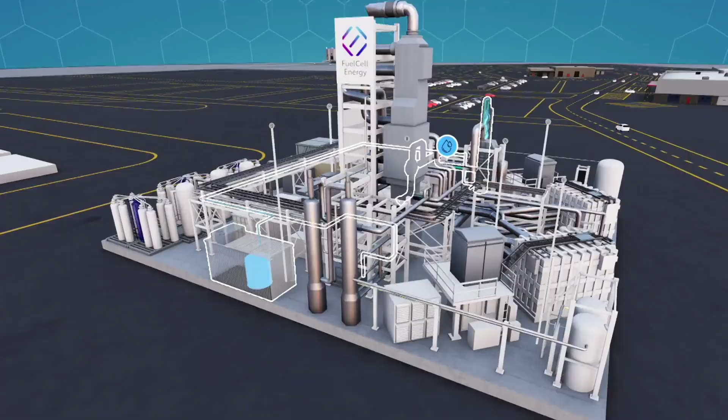Although FuelCell Energy's stock had a long, powering down phase, some investors hold on for another sizable rebound, partly because of promising developments like the agreement with CGN Yulchon Generation, CGN, a prominent independent power producer in South Korea. After we go over this powerful potential to push FuelCell back up, let's take a broader look at the background of what keeps some investors clinging to the clean energy company, to see the green future from their point of view.

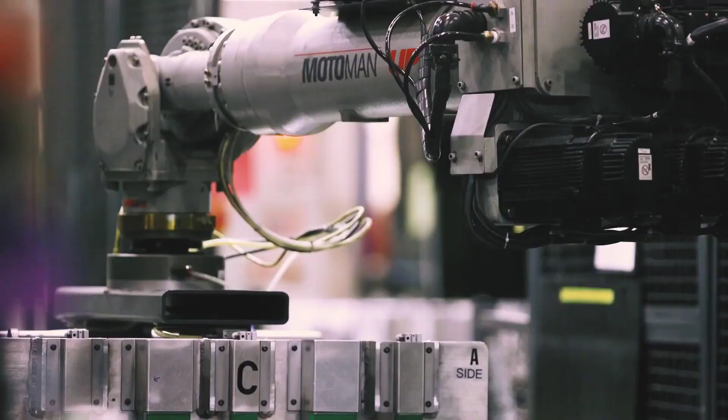The deal with CGN centers on the purchase of fuel cells and maintenance services. Under the terms of the deal, FuelCell Energy will supply CGN with 8 advanced carbonate fuel cell modules, along with comprehensive operations and maintenance services for 4 fuel cell units at CGN's Gwangyang facility. Each fuel cell unit comprises 2 fuel cell modules, and the agreement spans 7 years with an option for extension beyond the initial term.

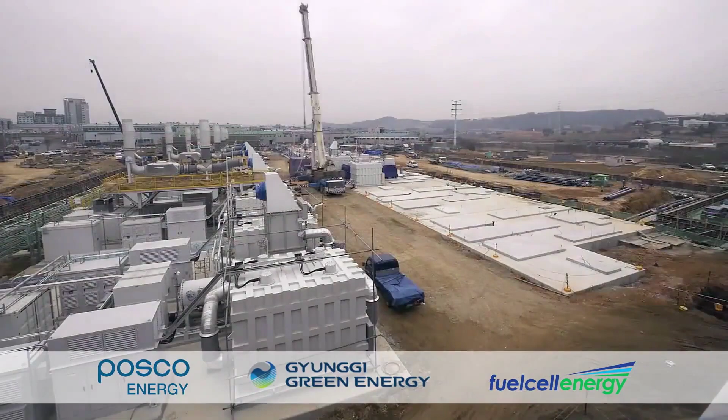The Gwangyang facility primarily focuses on electric power generation, transmission, and distribution, and operates 4 of FuelCell Energy's SureSource 3000 carbonate fuel cell systems. Each system produces 2.5 megawatts of low-carbon baseload power.

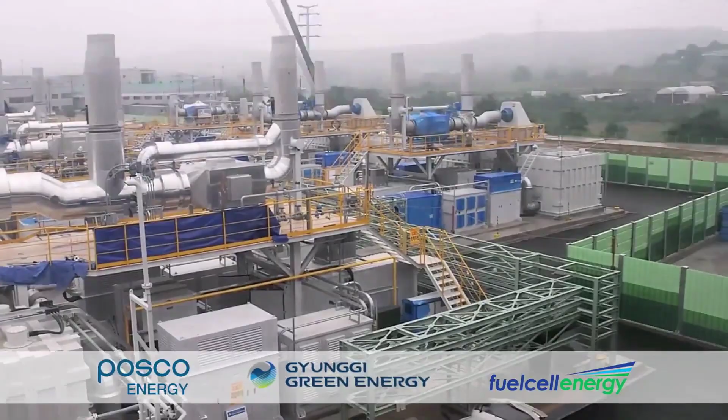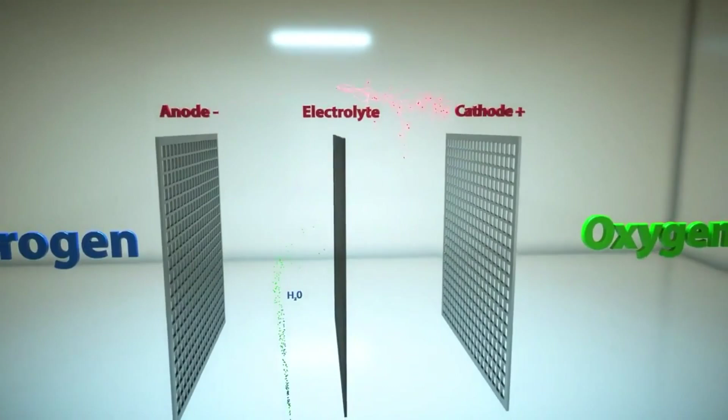The project aims to enhance the performance and extend the operational life of the installed units, aligning with CGN's decarbonization objectives and South Korea's hydrogen economy roadmap. This collaboration attracted optimism because it highlights FuelCell Energy's position as a leader in utility-scale electric power production and its strategic footprint in Asia's advanced fuel cell market. It also shows clear momentum in repowering utility-scale assets.

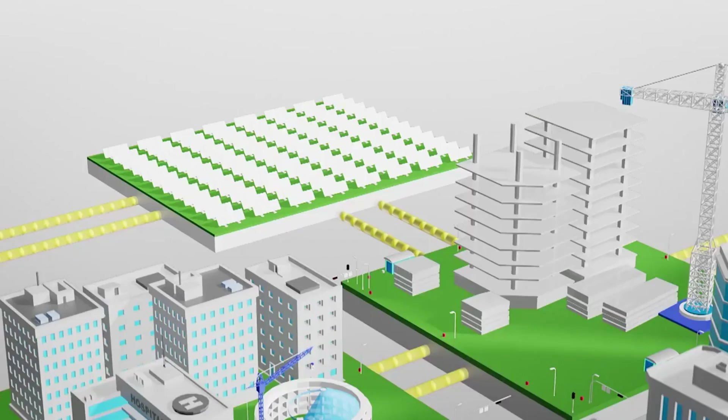With this agreement now in backlog, alongside existing partnerships with Gyunggi Green Energy and Noeul Green Energy, FuelCell Energy's future is charging up for continued growth. The company's technology offers a proven, scalable, and clean energy platform that supports electric grid security and meets the increasing demand for power driven by data center growth.

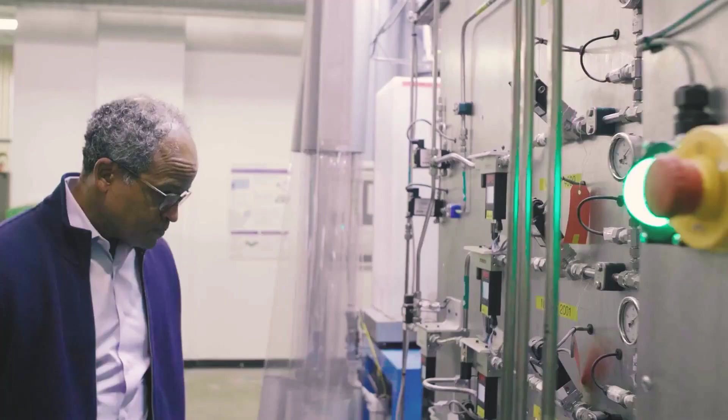FuelCell Energy's president and CEO, Jason Few, emphasized the company's ability to deliver reliable, high-performance fuel cell solutions that meet evolving partner needs. Few highlighted the company's contribution to Korea's clean energy agenda and its role in addressing the world's growing electricity demands through high-efficiency, low-emission baseload power.

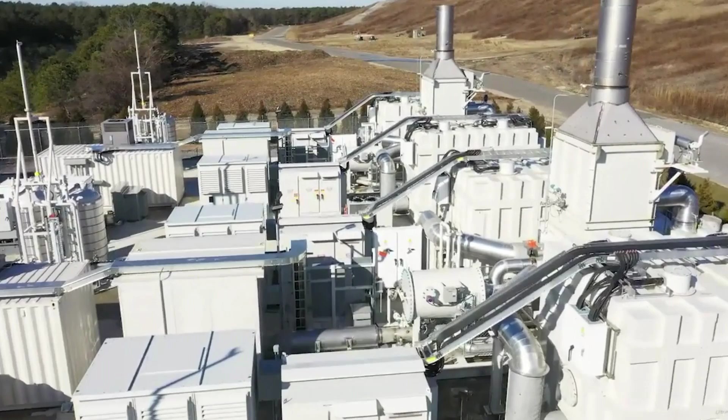FuelCell Energy's business in Korea validates its position as the only fuel cell provider delivering utility-scale power and steam for district heating and industrial processes. The company has maintained a dedicated service team in Korea since 2018, supporting over 100 megawatts of installed capacity across the country. Its long-term service agreement, LTSA, model ensures optimal performance and uptime through 24/7 monitoring, on-site technical support, and preventative maintenance, providing confidence in its clean energy solution for high-demand industries like data centers.

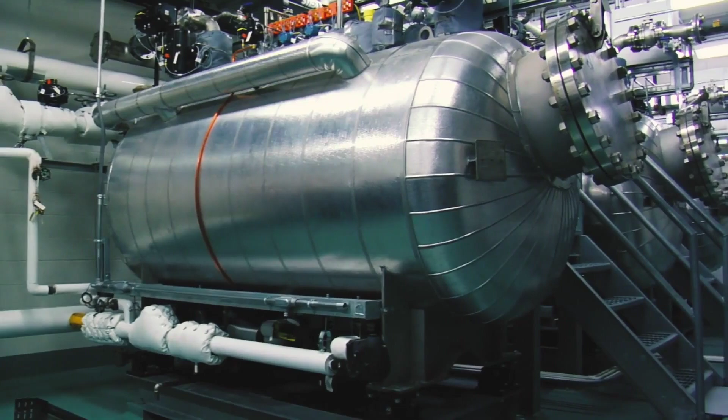Founded in 1969 and headquartered in Danbury, Connecticut, FuelCell Energy has been innovating and developing commercial technologies that produce clean electricity, heat, clean hydrogen, and water, as well as carbon capture technology. Their business model focuses on generating recurring revenue through power purchase agreements and long-term service agreements, as well as non-recurring revenue through power platform and component sales and research contracts.

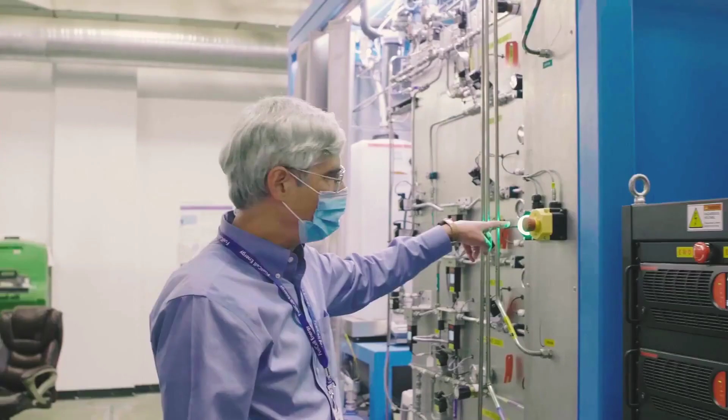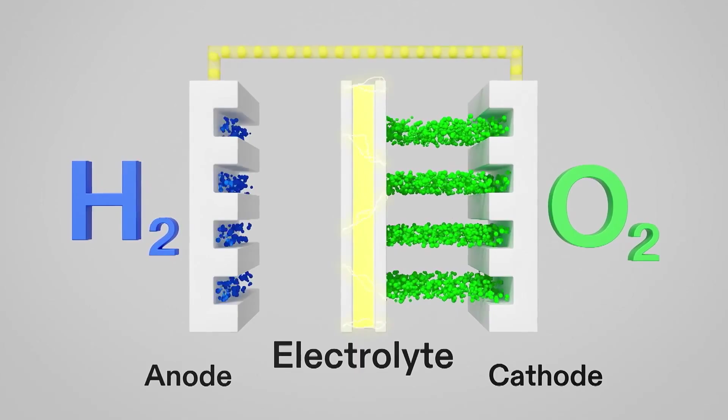FuelCell Energy's commercial product portfolio is based on its carbonate electrochemical platform, which offers a range of products for power and chemical applications like electricity, hydrogen, high-grade heat, water, and CO2 upgradable to food and beverage grade. The main target markets and applications are utilities and independent power producers, data centers, wastewater treatment, commercial and hospitality, food and beverage, and microgrids. FuelCell Energy markets its products primarily in the United States, Europe, and Korea, and is also pursuing opportunities in other countries around the world.

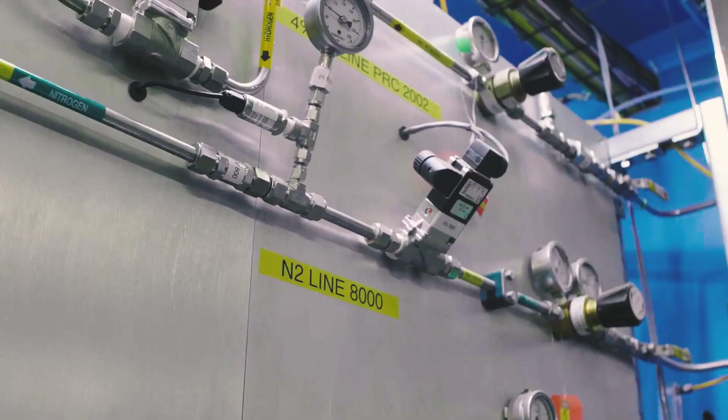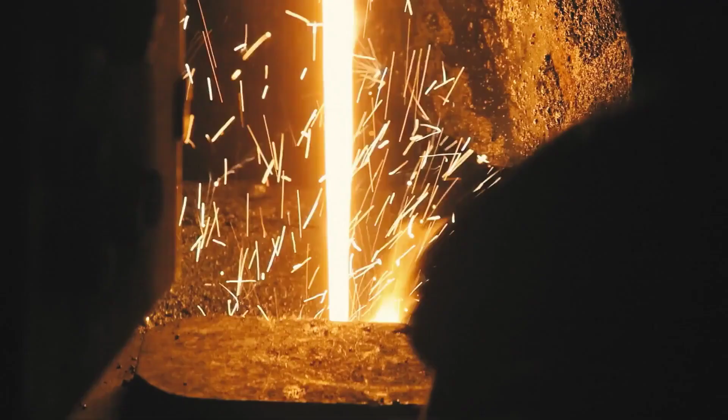Research and development efforts focus on generating revenue from its core recurring and non-recurring revenue sources, while also identifying new trends in clean energy that can be commercialized and grown into future revenue streams. The company believes that a large and growing addressable market opportunity exists for its commercially available solutions, and those solutions that are actively being developed for commercialization.

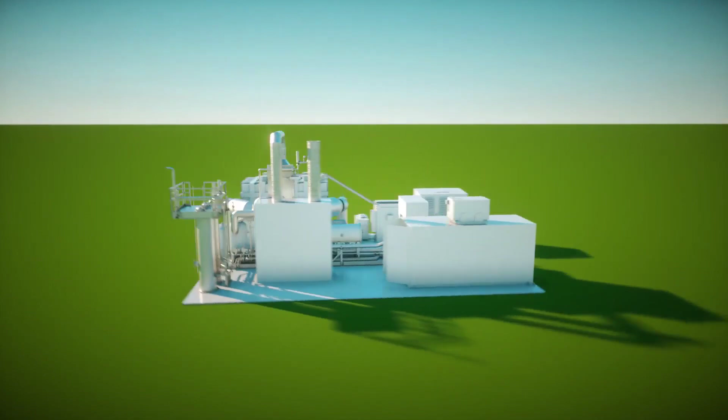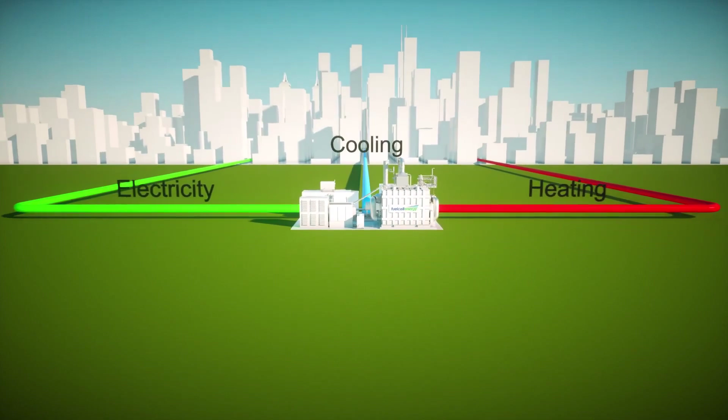Through the capabilities of its platforms, FuelCell Energy provides clean, reliable baseload power generation, hydrogen production, high-grade heat, carbon recovery, and the ability to use biofuels, renewable natural gas, and a hydrogen-hydrocarbon fuel blend for power generation feedstock. Additionally, their platforms can deliver the benefits of clean, distributed power generation, including the desirable value stream of thermal energy, and avoid the need for massive, expensive transmission infrastructure.

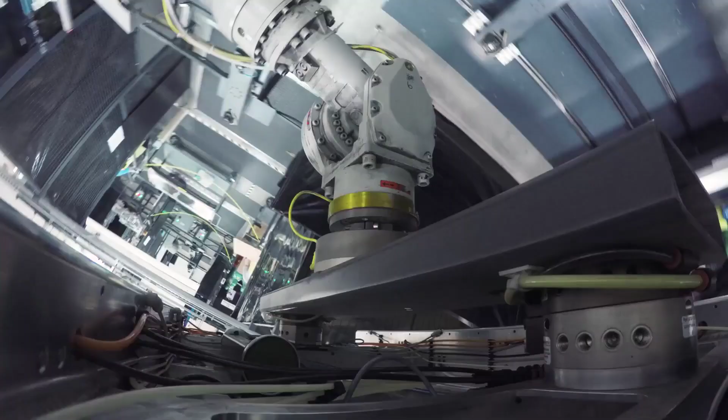FuelCell's platforms are also capable of delivering CO2 for various uses, such as food and beverage, pH balancing of water supply, and production of synthetic fuels, polymers, and other minerals.

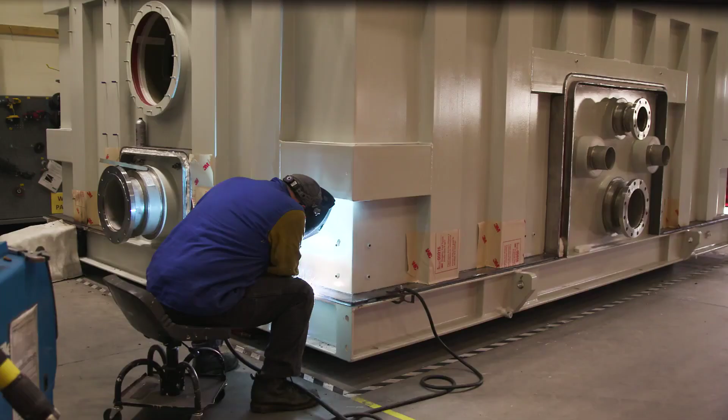Recurring revenue is delivered through electricity, capacity, and renewable energy credit sales under power purchase agreements (PPAs) and tariffs, as well as service revenue from long-term service agreements. Non-recurring revenue is generated through power platform and component sales, as well as from research contracts related to the development of advanced technologies.

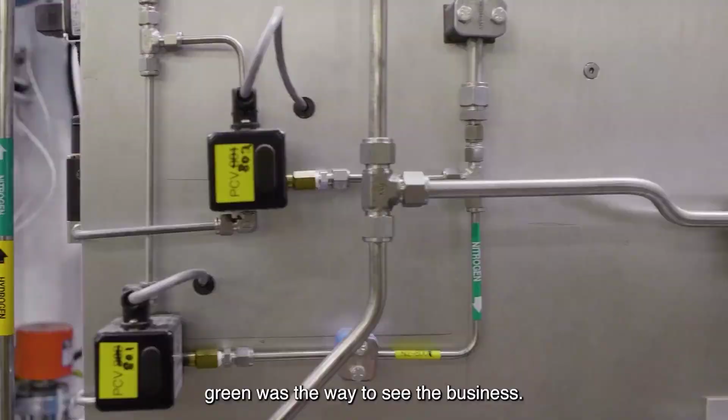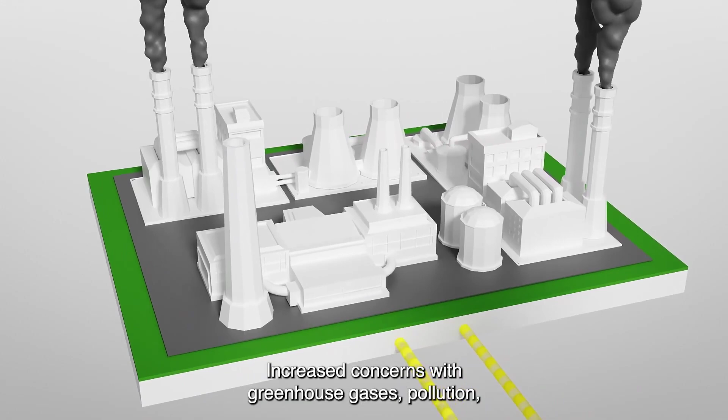FuelCell is a complete solutions provider for its platform solutions, controlling the design, sales, manufacturing, installation, operations, and maintenance of its patented fuel cell technology. They offer customers the option to either purchase its fuel cell platforms outright or enter into a PPA, under which the customer commits to purchase power as it is produced for an extended period.

The company may elect to retain ownership of a project or sell it to a third party, recognizing revenue from the sale and reflecting it in the product revenues line item.

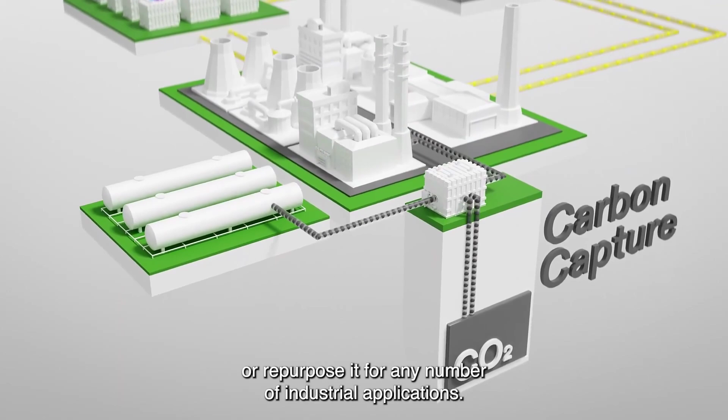FuelCell's product portfolio is based on its carbonate electrochemical platform, which supports power generation and combined heat and power applications using a variety of fuels, including a blend of hydrogen and natural gas or biogas blends, biogas, renewable natural gas, and natural gas. The fuel cells utilized in these platforms react fuel electrochemically without combusting the fuel, which avoids emissions produced by combustion such as nitrogen oxides, sulfur oxides, and particulates.

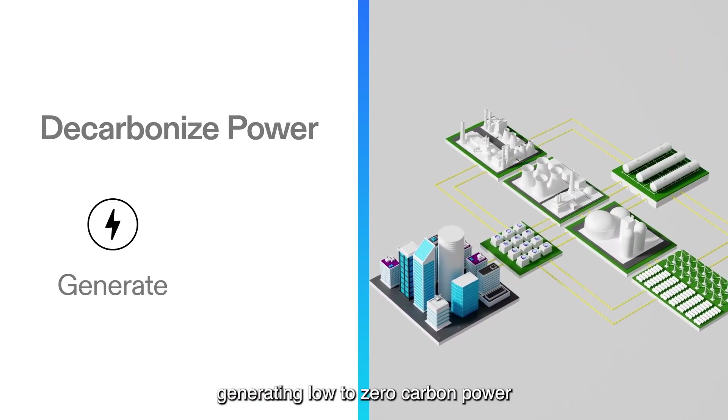Carbonate platforms are enabled to recover and capture their own CO2 for use or sequestration before it is emitted into the air. These platforms are unique in their ability to also capture CO2 from an external source, utilizing the flue stream of a power plant or an industrial boiler as a replacement for ambient air intake.

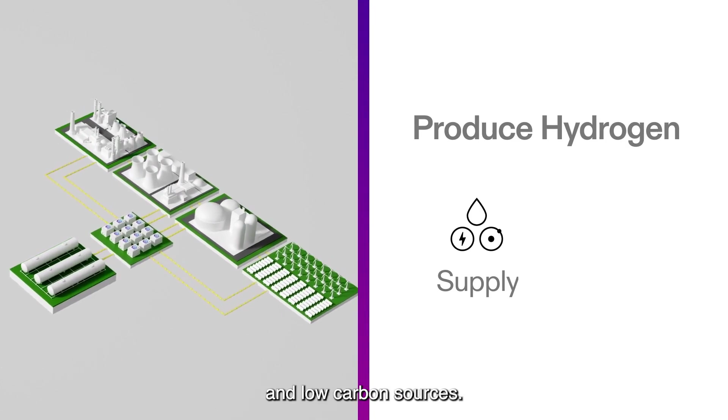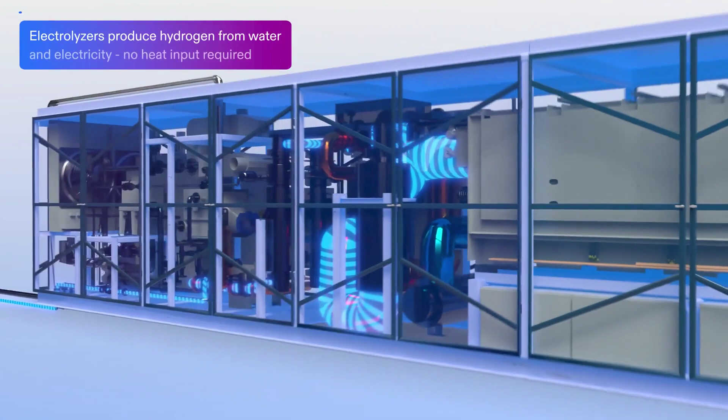There's also continued investment in the development and commercialization of its solid oxide fuel cell platform, including actively seeking strategic partnerships that will enable it to deploy this technology as part of larger-scale energy, emissions reduction, and hydrogen generation projects. The multi-featured platforms can be configured to provide a number of value streams, including electricity, hydrogen, high-grade heat, water, and CO2 upgradable to food and beverage grade, and/or usable in cement or other industrial products.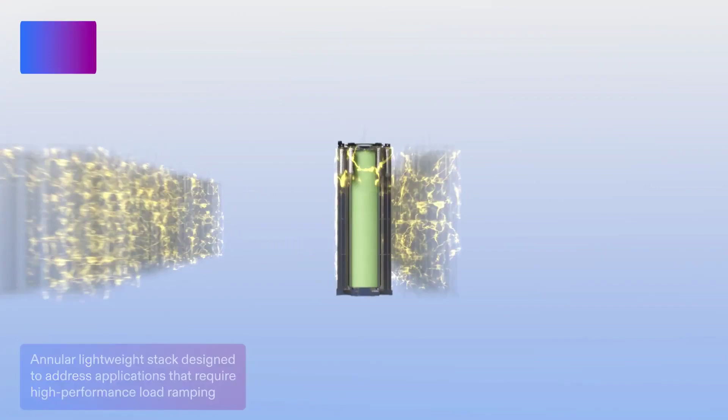The electrical efficiency of carbonate fuel cell solutions ranges from approximately 47% to 60% upon initial operations of its platforms, depending on the configuration. When configured for combined heat and power, the system efficiencies can potentially reach up to 90%, depending on the application. Solutions are designed to deliver high electrical efficiency where the power is used, avoiding transmission line losses.

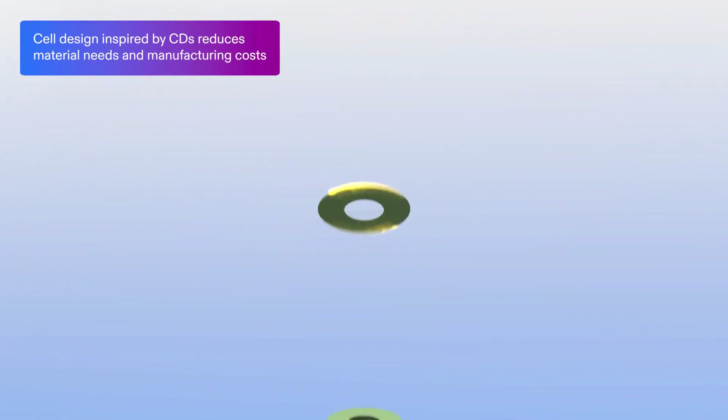Up to 95% carbon capture has been demonstrated from simulated coal power plant sources, while simultaneously producing baseload power. For harder-to-capture streams, such as natural gas power generation or industrial boiler capture, similarly high capture levels can be achieved, but with reduced power output.

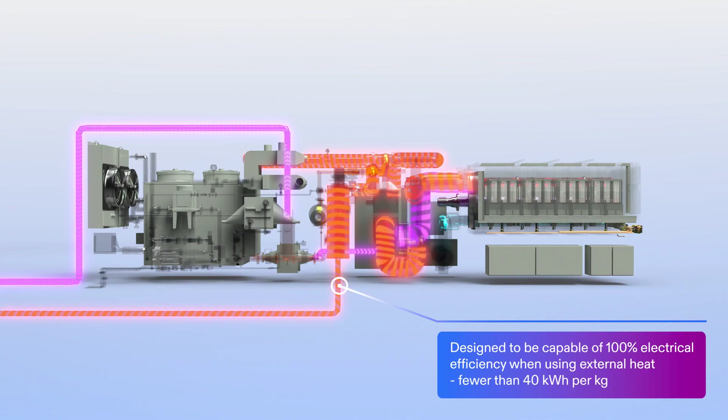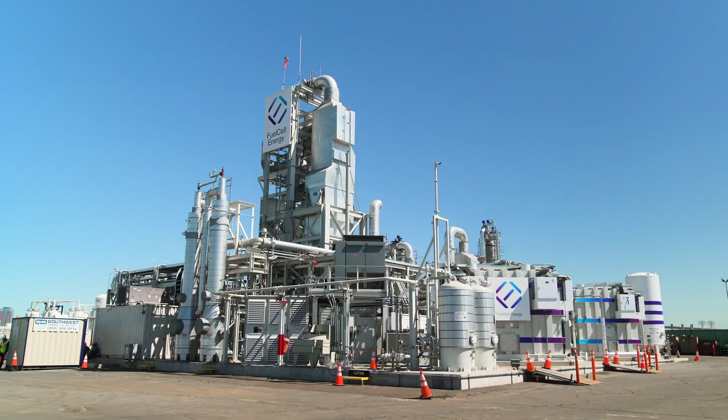FuelCell's product platform applications include carbonate-based distributed generation, carbonate-based distributed hydrogen, solid oxide-based electrolysis, and solid oxide-based long-duration hydrogen-based energy storage. Proprietary, patented platforms generate electricity directly from fuel, such as hydrogen, hydrogen and natural gas blends, biogas, renewable natural gas, and natural gas. The company's Tri-gen platforms are configurable to deliver on-site hydrogen for transportation, industrial applications, natural gas blending...

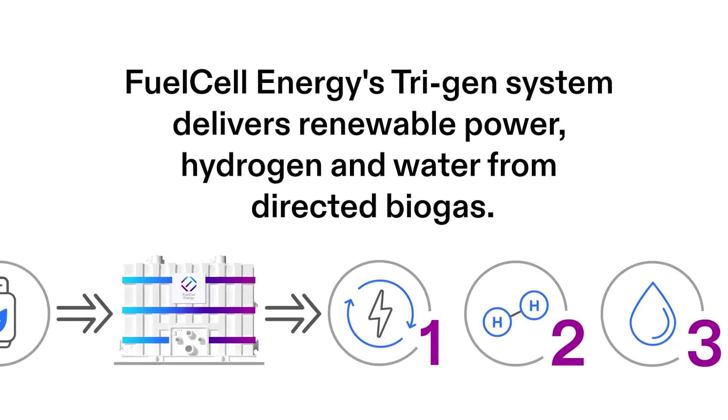...repowering combustion-based equipment with zero-carbon hydrogen, and other uses, while the solid oxide electrolysis technology is expected to enable production of hydrogen with high electrical efficiency.

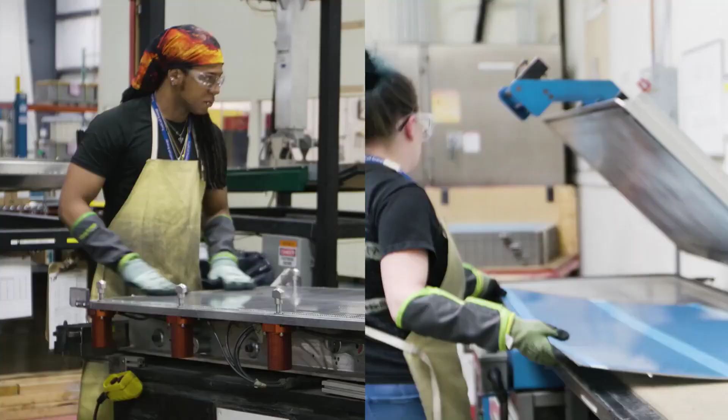At the same time, development is underway for a solution to deal with long-duration energy storage using its proprietary solid oxide electrolysis technology. FuelCell's solid oxide stacks are designed to alternate between electrolysis and power generation mode, with one of the design goals being improved integration of intermittent wind and solar power generation sources into the modern electrical grid via long-duration storage of energy.

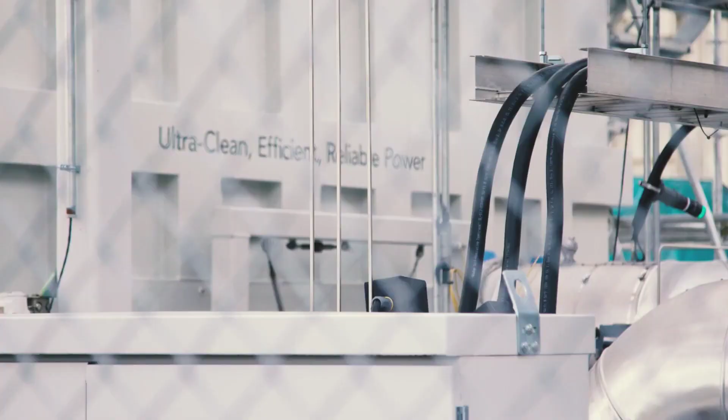To complement that, there's work on carbon capture, recovery, and utilization. The carbon capture system is being designed to separate and concentrate CO2 from the flue gases of natural gas, biomass, or coal-fired power plants or other industrial facilities. The carbon separation technology allows carbon dioxide to be easily extracted and purified to the appropriate level for utilization or sequestration, significantly reducing the carbon footprint of the generated power from its fuel cell platforms.

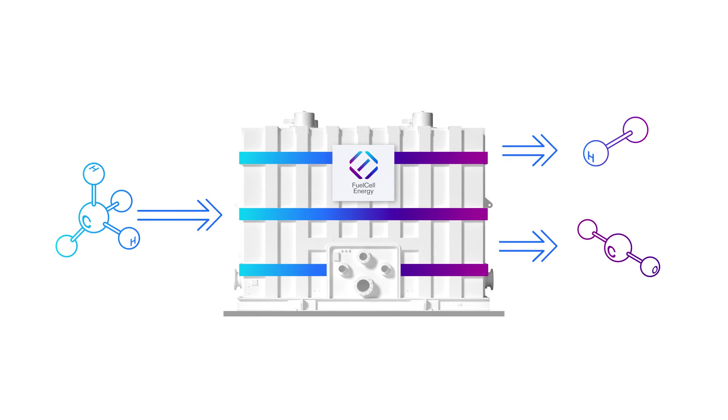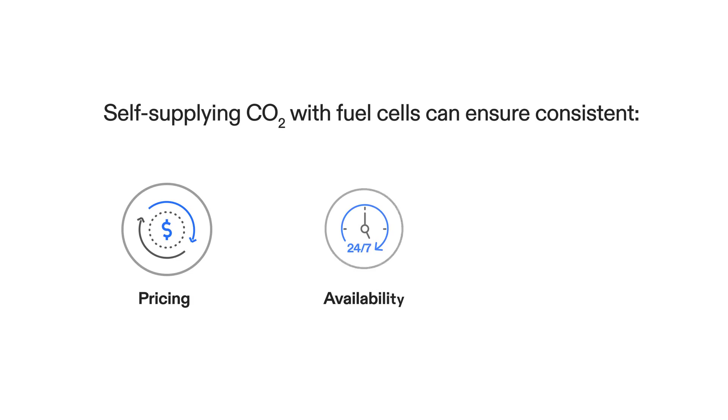When looking at FuelCell's four distinct targeted market opportunities, distributed generation covers utilities and independent power producers, data centers, wastewater treatment, and other behind-the-meter and microgrid applications. Carbon recovery and utilization includes food and beverage and various industrial applications.

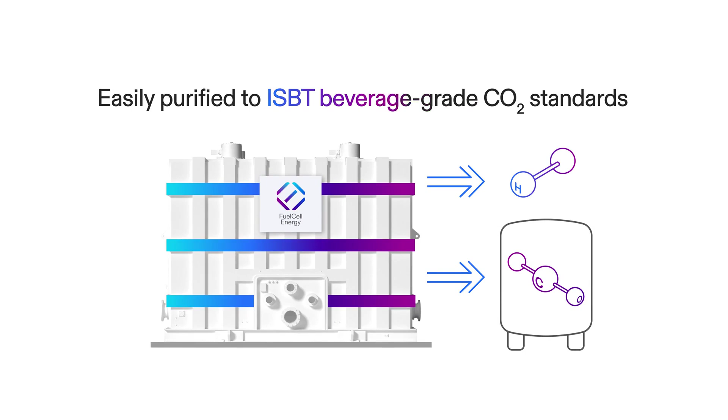Carbon capture includes high CO2 emitters, such as the oil and gas sector. Distributed hydrogen includes industrial hydrogen applications, like fertilizer, mobility and material handling, port applications, and large-scale wind and solar projects for their ability to produce green hydrogen via electrolysis. FuelCell's power platforms are fueling customers from manufacturing facilities and pharmaceutical processing facilities to universities, healthcare facilities, and wastewater treatment facilities.

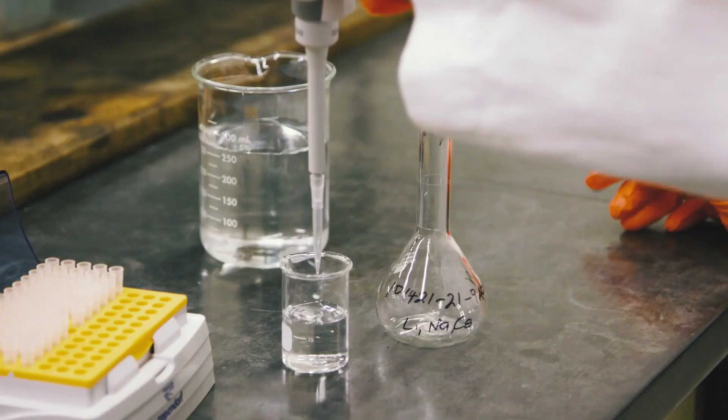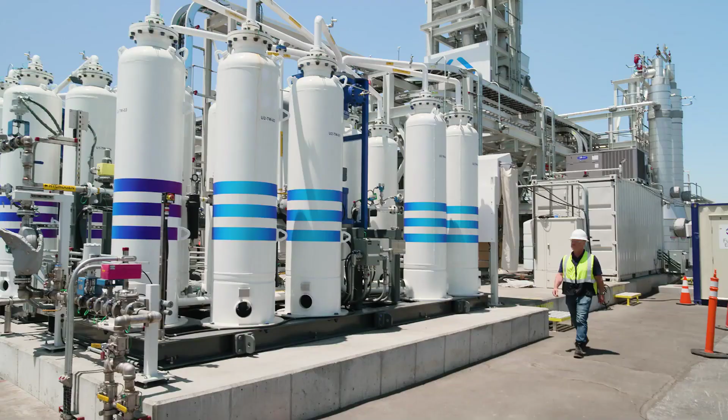Levelized cost of energy, LCOE, is measured over the life of a project, which includes capital cost, operations and maintenance cost, and fuel expense. Managing and reducing costs in all 3 LCOE areas involves cost system components and raw materials, advanced lean manufacturing principles, and improvements in lifetime product costs.

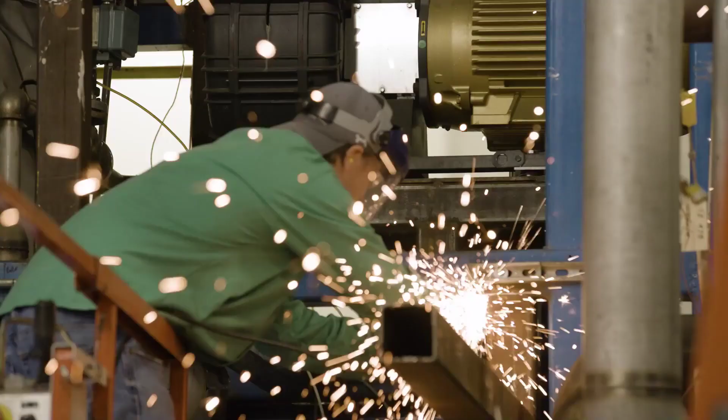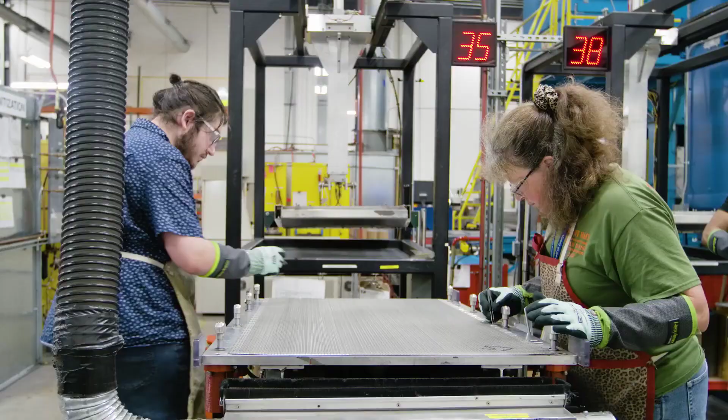The market for clean energy is highly competitive, with many factors affecting how clean energy can deliver outcomes for customers in a given region. FuelCell's platforms compete against large-scale solar and wind technologies. Although the company complements the unreliable intermittent nature of solar and wind power with the continuous, reliable power output of its fuel cells, the stationary fuel cell platforms also compete against other technologies such as microturbines, turbines, and reciprocating gas engines.

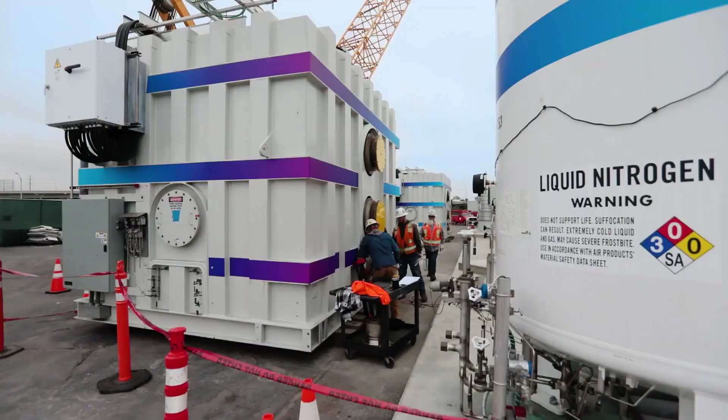FuelCell's goal is to continue to improve its competitive position, including innovating in areas such as offering multiple platform solutions and methods for producing clean hydrogen, solid oxide, and carbon separation and carbon capture in order to add value for customers looking for clean and renewable energy and to aid in their decarbonization goals.

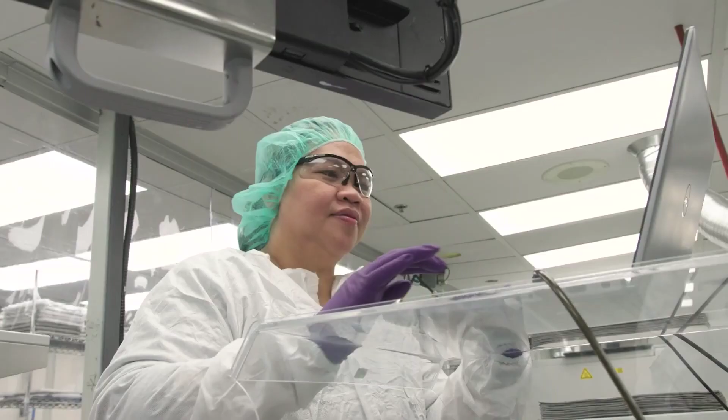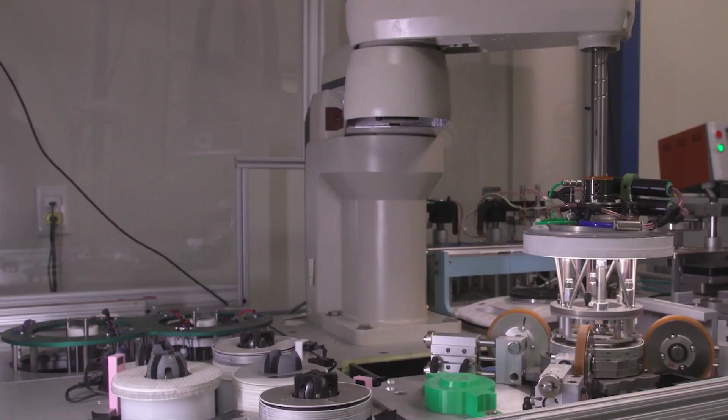FuelCell often highlights advantages like negligible amounts of NOx, SOx, and particulate matter emissions, and the ability to operate for many more hours of the day compared to intermittent resources like solar and wind. The company's platforms can also be used to produce hot water or steam, as well as hydrogen and carbon dioxide for beverage and food production, in addition to other industrial uses.

The Advanced Technologies Programs involves research and development and demonstration programs funded by third parties. These programs are focused on developing and commercializing solutions that advance solid oxide fuel cells, distributed hydrogen, and carbon capture. The company reports the revenue earned under these programs as Advanced Technologies contract revenues in its consolidated statements of operations and comprehensive loss.

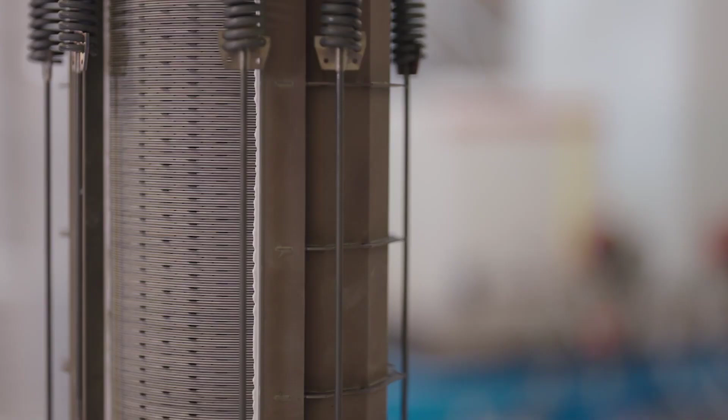Historically, FuelCell has worked on technology development with various U.S. government departments and agencies, including the U.S. Department of Energy, the Department of Defense, the Environmental Protection Agency, the Defense Advanced Research Projects Agency, the Office of Naval Research, the Department of State, and the National Aeronautics and Space Administration. Government funding has provided a small percentage of the company's revenue in recent years.

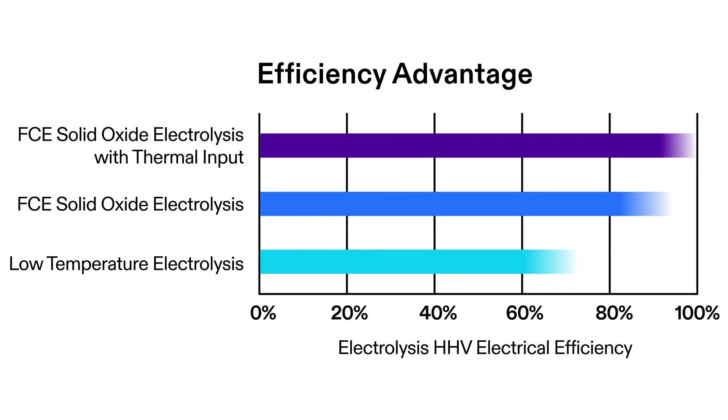In addition to government funding, the company also works to develop technologies through privately funded programs, with companies like Canadian Natural Resources, Drax Group, and ExxonMobil Technology and Engineering Company. The company has a license and joint development agreement with ExxonMobil Technology and Engineering Company, which facilitates the further development of the company's carbon capture platform.

The joint development agreement, which was originally effective as of October 31, 2019, has been amended several times to extend the term and increase the maximum amount of research costs to be reimbursed by ExxonMobil Technology and Engineering Company. The most recent amendment, Amendment Number 5, extended the term of the joint development agreement to December 31, 2026, and removed the cap on the maximum amount of research costs to be reimbursed.

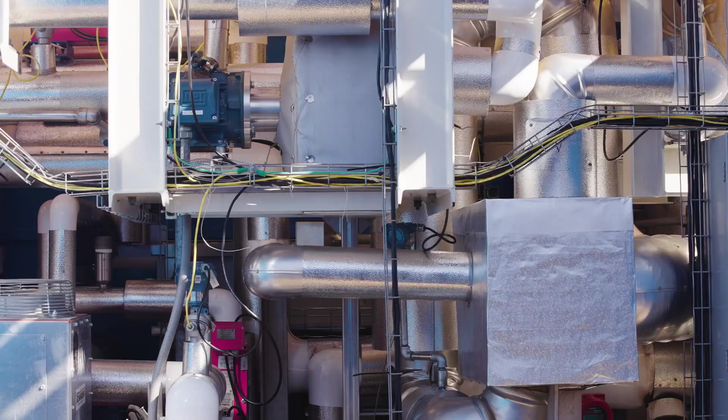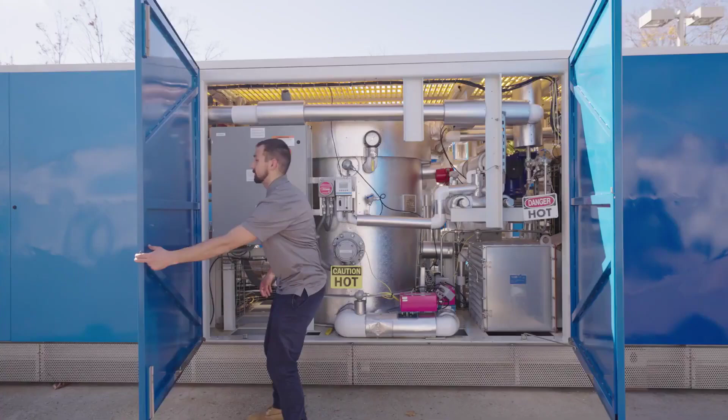Under the joint development agreement, FuelCell and ExxonMobil Technology and Engineering Company will pursue continued work to allow for technical readiness of the Generation 2 technology fuel cell module, as well as additional continuous technology development. FuelCell will also have the opportunity to pursue new carbon capture projects with third parties using Generation 1 technology or Generation 2 technology, with any new sales of such activities having the capability of capturing no more than 250,000 tons of CO2 on a cumulative annual basis.

FuelCell has also been granted a worldwide, non-exclusive, royalty-free, irrevocable license to ExxonMobil Technology and Engineering Company's Generation 1 technology and Generation 2 technology physical fuel cell properties and design elements. This license will allow FuelCell to continue to service continuing obligations for projects entered into during the term of the Joint Development Agreement.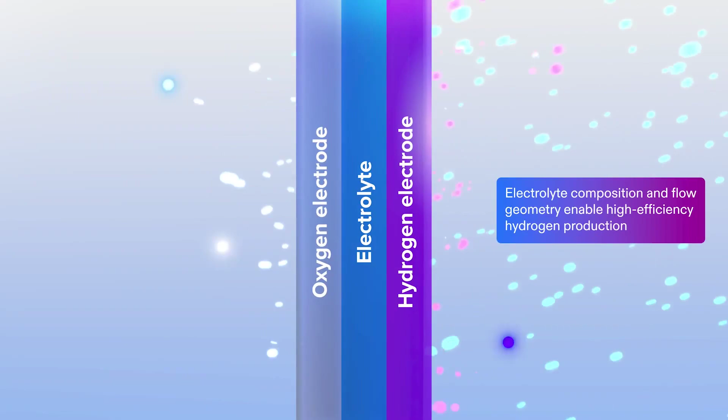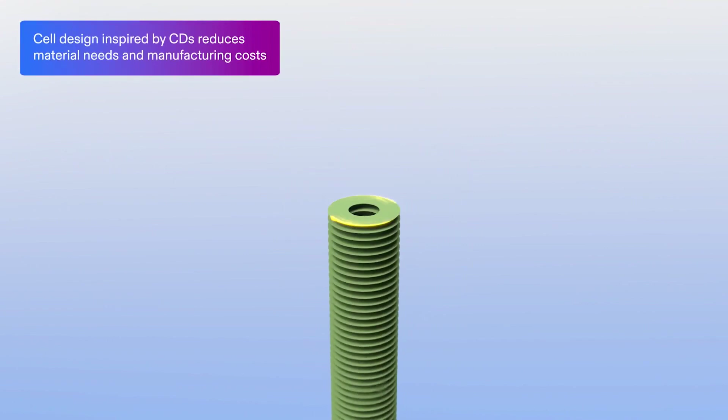Research and development also focuses on delivering more uniform temperature distribution within the stack modules, improving output over the life of the modules, and extending the design life and output of its modules over time.

Investment is also going into the commercialization of FuelCell's patented technologies, such as carbon capture and separation, solid oxide fuel cells, and solid oxide electrolysis cells for hydrogen production and energy storage.

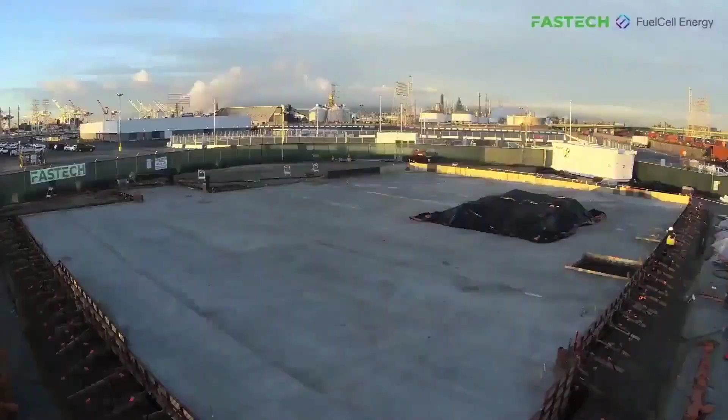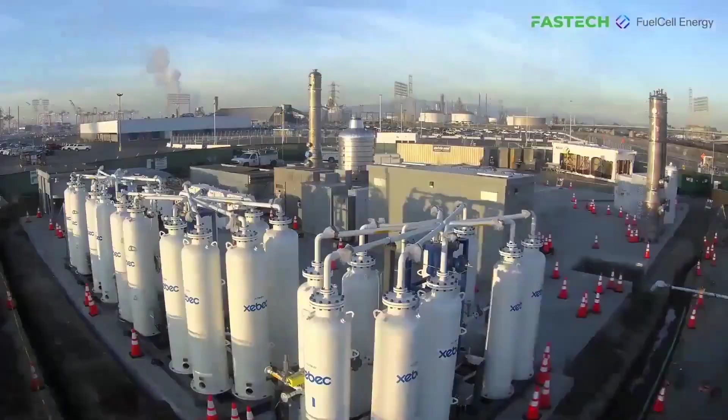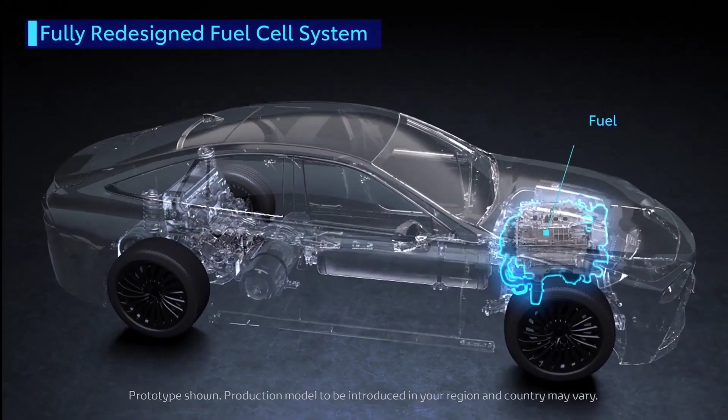FuelCell has developed a module design that enhances its ability to compete for large-scale infrastructure projects. This design incorporates all hot gas piping inside the module, which is expected to greatly improve serviceability and operational availability. The company believes that focusing on the core module technology and design allows it to dedicate its engineering resources to the advancement of the stack and module technology, including both performance and cost, and maintaining a competitive edge versus the competition. FuelCell's intellectual property consists of patents, trade secrets, institutional knowledge, and know-how that it believes is a competitive advantage and represents a barrier to entry for potential competitors.

The company has extensive experience in designing, manufacturing, operating, and maintaining fuel cell power plants, which cannot be easily or quickly replicated, and, combined with its trade secrets, proprietary processes, and patents, safeguards its intellectual property rights.

One of its main facilities is a 167,000 square foot manufacturing facility in Torrington, Connecticut, where the Global Service Center is also located. Here is where they produce individual cell packages and assemble fuel cell modules for its carbonate fuel cell products. Investment has gone into manufacturing capability with the goal of reducing production bottlenecks and driving productivity, including investments in automation, laser welding, and the construction of additional integrated conditioning capacity.

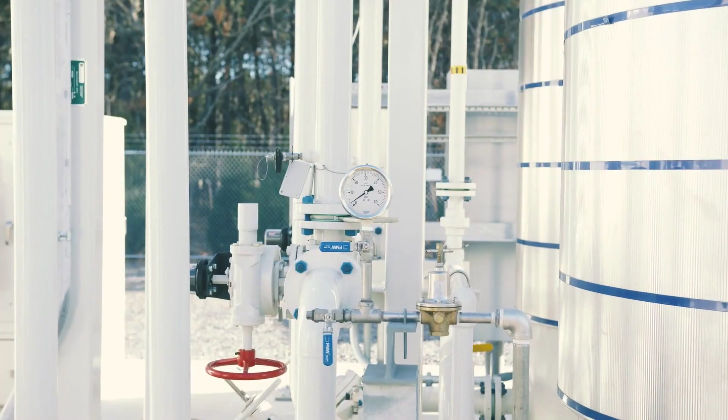For megawatt-scale power plants, 4 fuel cell stacks are combined to build a 1.4 megawatt fuel cell module. To complete the power platform, the fuel cell module or modules are combined with the balance of plant. FuelCell has a global integrated supply chain with qualified sources of supply, many of which are located locally in the regions in which it has established manufacturing and service operations.

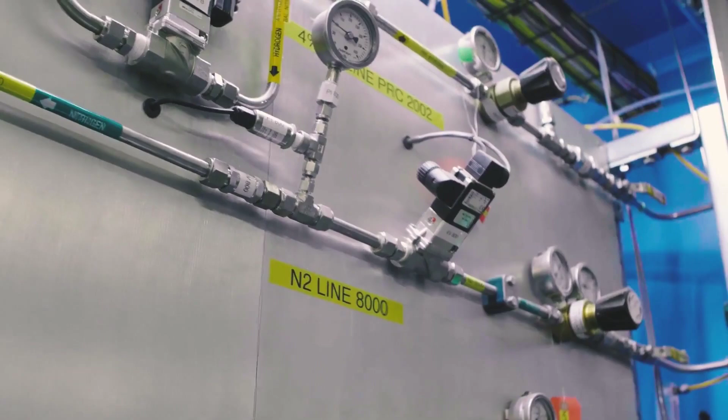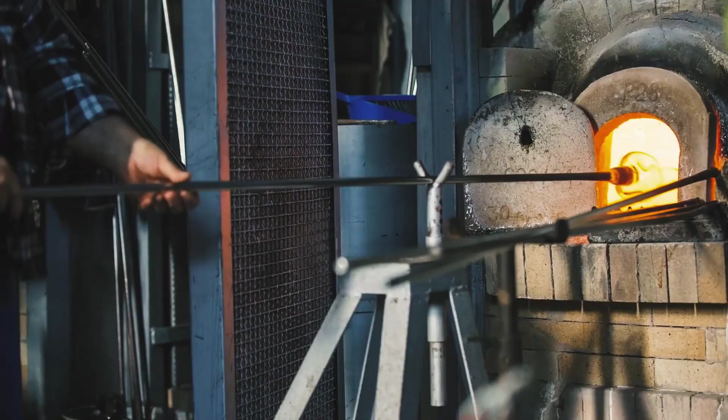The Manufacturing and Research and Development Facility in Calgary, Alberta, Canada, is focused on the engineering and development of its solid oxide fuel cell and solid oxide electrolysis cell technologies. The facility includes equipment for the manufacturing of solid oxide cells and stacks. The company has also invested in the Calgary facility to establish a center of competence and excellence for solid oxide cell and stack research and manufacturing.

In Taufkirchen, Germany, there's a manufacturing and service facility that has the capability to perform final module assembly for up to 20 megawatts per year of sub-megawatt fuel cell power platforms to service the European market. The company's operations in Europe are certified under both ISO 9001:2015 and ISO 14001:2015.

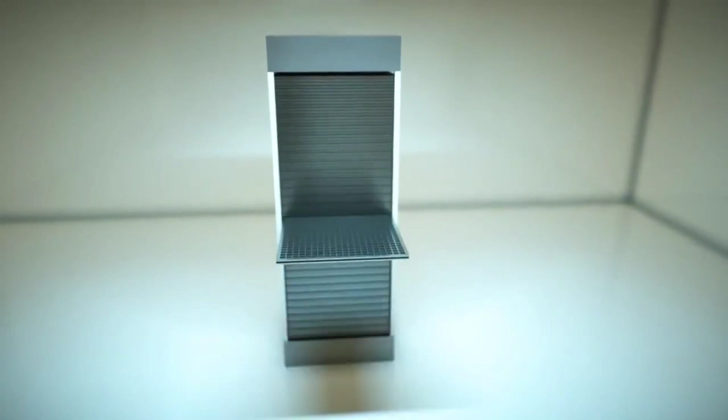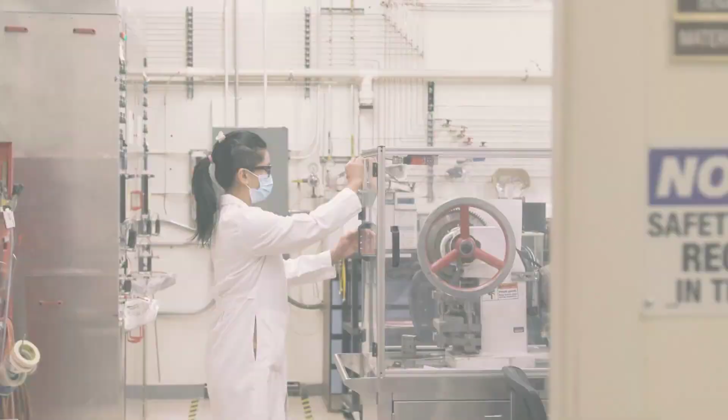The company sources various commercially available raw materials and components to construct a fuel cell module, including nickel and stainless steel. The company has a global integrated supply chain with qualified sources of supply, many of which are located locally in the regions in which it has established manufacturing and service operations. As FuelCell continually evaluates and qualifies new suppliers, it diversifies its supplier base in its pursuit of lower costs, security of supply, and consistent quality.

FuelCell offers a comprehensive portfolio of services, including engineering, project management and installation, and long-term operating and maintenance programs. The company directly employs field technicians to service the power platforms and maintain distribution centers near its customers to support the high availability of its platforms.

For all operating fuel cell platforms not under a power purchase agreement (PPA), customers purchase long-term service agreements (LTSAs), some of which have terms of up to 20 years. The pricing structure of the LTSAs incorporates scheduled fuel cell module exchanges, and the committed nature of this production facilitates the company's production planning. Future production has been committed for scheduled fuel cell module exchanges under LTSAs and PPAs through the respective expiration dates of such LTSAs and PPAs, which range through 2042.

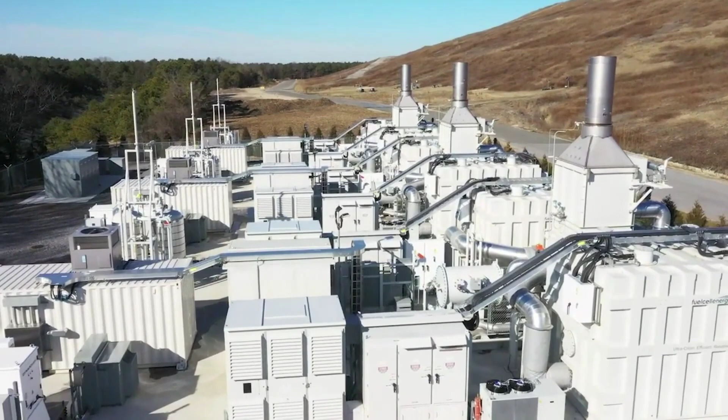A warranty is provided for its products against manufacturing or performance defects for a specific period of time. The warranty term in the U.S. is typically 15 months after shipment or 12 months after acceptance of its products. FuelCell accrues for estimated future warranty costs based on historical experience, a practice that'll be crucial to get right with the potential for a growing backlog of deals.